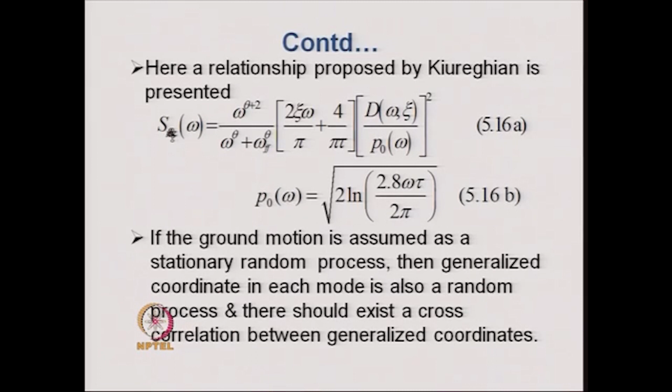Now, if the ground motion is assumed as a stationary random process, then the generalized coordinate in each mode is also a random process, and there should exist a cross correlation between the generalized coordinates, as I mentioned before. So, with this background in view, the response spectrum method of analysis can be extended for multi-support excitation, and today we are going to discuss about that.

Because there exists a cross correlation between two modal peak responses, if we consider these rho ij, then the CQC rule provides a better estimate than the SRSS rule of combination, that we mentioned also.

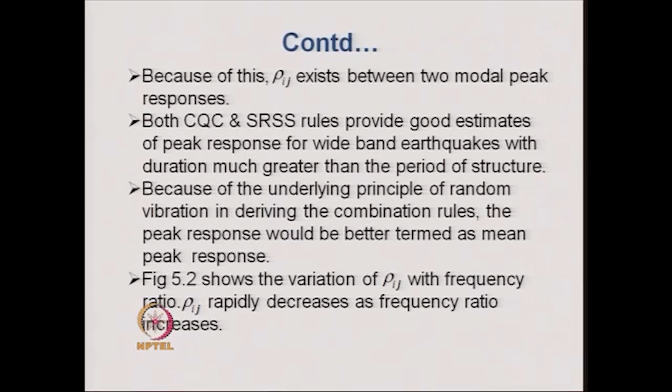So, let us see what basically rho ij looks like, that is the correlation between the two modal responses rho ij, plotted with respect to omega i by omega j, that is the frequency ratio between the two modes. If we look at that plot, it looks like this, and the corresponding equations 5.14 and 5.15 that we discussed in the last lecture show that rho ij is a function of beta ij, where beta ij is the ratio between omega i and omega j, and xi is the specified damping ratio.

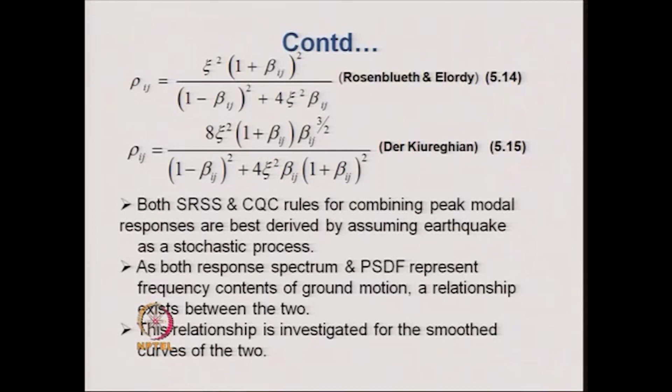So, two such empirical equations for rho ij were developed, one by Rosenblueth and the other by Der Kiureghian, and if we plot them against beta ij, that is the frequency ratio, the plot looks like this, and one can see that the left hand side is a symmetric half of the right hand side. If we look at the right hand side, that is the positive frequency ratios, we can see that as the frequency ratio omega i by omega j increases, the rho ij sharply falls down, and beyond a certain value of the ratio, the correlation coefficient is almost equal to zero.

That justifies the use of SRSS rule. SRSS rule is applicable when the two frequencies are well separated, and once they are well separated, the frequency ratio is also high, and as a result the correlation between two modal responses can be ignored and they can be considered as independent random variables.

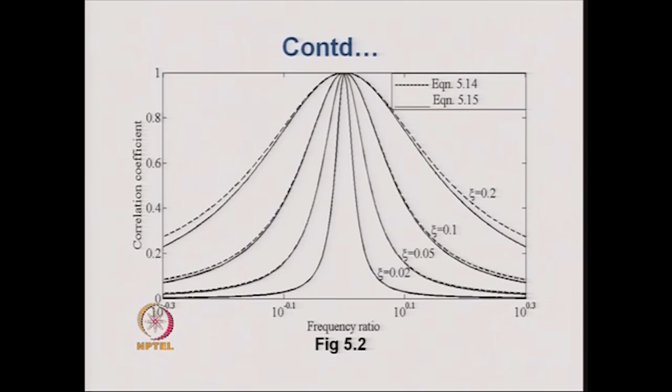Using this figure and two equations, that is the empirical equation on rho ij that was developed, we take care of the correlation between the two modal responses, and using the CQC rule one can obtain the combination between the two responses.

Now let us look at an example. In this example, what has been done is that the power spectral density function has been obtained from the smooth displacement response spectrum and FFT of the El Centro record. That is, we used the El Centro record, and from it we obtained a response spectrum and smoothened it.

Then also for the same time history, we obtained the power spectral density function using FFT, and it was smoothened, and then these two were compared in this figure.

You can see the unsmooth comparison, that means the unsmooth power spectral density functions obtained by these two approaches are compared in the first figure, and then when they are smoothed with 5-point smoothing, you can see that both PSDFs compare quite well.

That is the equation used for obtaining the power spectral density function of ground acceleration from the displacement response spectrum for a given damping, and it is quite valid, as seen from this example.

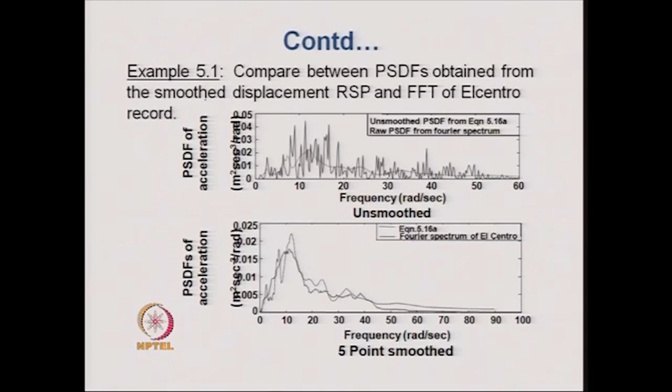Now let us come to the application of the response spectrum method of analysis for 2D frames. 2D frame means a building frame, multi-bay, multi-story building frame, and for that we proceed in this fashion. First, the dynamic degrees of freedom are considered, and generally for 2D frames these are considered as the sway degrees of freedom.

These sway degrees of freedom are obtained by the condensation procedure, done slightly differently than the condensation procedure discussed before. Here, we write down the entire stiffness matrix of the frame with the rotations included.

Then we apply unit load in the sway direction one by one. That is, first we provide a unit load at the top of the frame and put 0 corresponding to other sway degrees of freedom, perform an analysis of the structure, and find out the sway responses at all degrees of freedom, putting them into a vertical column.

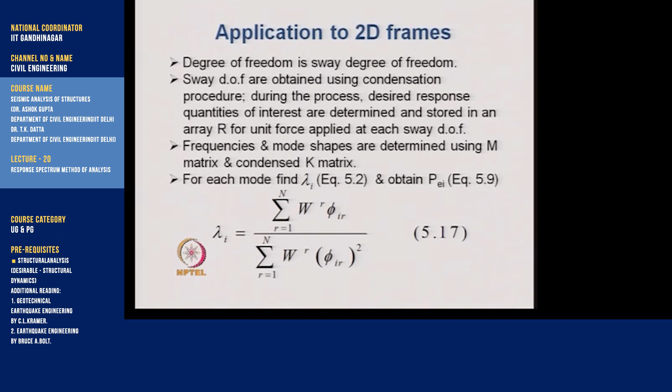So, corresponding to the sway degrees of freedom, this flexibility matrix of the structure can be inverted to obtain the condensed stiffness matrix for the sway degrees of freedom of the frame.

Sometimes there are algorithms which require only the mass matrix and the flexibility matrix of the structure rather than the stiffness matrix. With the help of that, the eigenvalues can also be obtained. So either we invert the flexibility matrix or we directly use the flexibility matrix to obtain the mode shapes and frequencies of the structure.

By the time we do that, we have also in an array R the response quantities of interest that are stored for unit forces applied at different sway degrees of freedom.

Now, for each mode of vibration, one can calculate lambda I using the equation described before. Instead of the mass m into I, we replace it by a summation convention, that is W r into phi I r, summed for all the floors, where W is the weight of the floor rather than the mass. Since the mass appears both in the numerator and denominator, it does not matter whether we consider mass or weight.

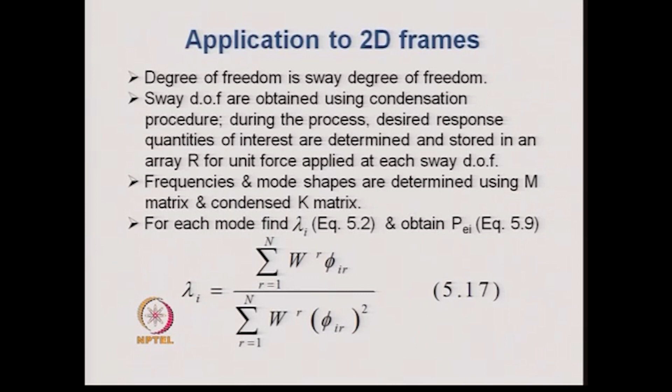Once we obtain the lambda I, we obtain the PEI, the equivalent lateral load that exists on the structure for each mode of vibration, from J equal to 1 to R. R is the number of modes considered, and PJ is calculated as discussed before for single point excitation.

Any response quantity of interest, say Rj, such as bending moment, shear force, drift, or any other response quantity, can be obtained by multiplying the equivalent lateral load with the coefficient matrix for the response obtained before and stored when obtaining the flexibility matrix of the structure by applying unit load at different sway degrees of freedom.

After that, one can combine the modal peak responses either using the CQC or SRSS rule, and that provides us the mean peak response that is desired.

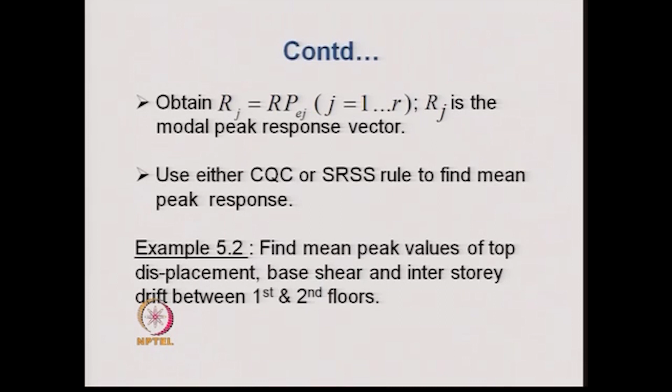A problem is now solved to obtain the mean peak values of top displacement, base shear, and interstory drift between the first and second floor for a 4-story 2D frame, which was solved before for the deterministic ground motion, the same El Centro ground motion, applied as a time history to this 4-story frame. The peak values of those results are known to us, and the same frame is now analyzed using the response spectrum method of analysis.

Here the response spectrum used is that of the El Centro earthquake. The digitized values of this response spectrum are available in many books, including the reference book for these slides.

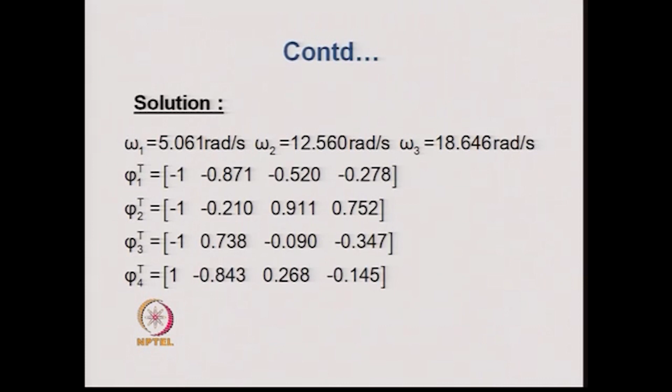The frequencies omega 1, omega 2, and omega 3, the three frequencies of the structure, are given, and then the corresponding mode shapes are shown. We have given all 4 modes.

Then we compared the mean peak values of the responses obtained by different methods in Table 5.1. When we consider 2 modes only, the SRSS rule gives 0.9171 as the response. The CQC rule gives 0.9121, quite close. The absolute sum gives 0.9621, which is expected to be greater than the CQC or SRSS rule.

The time history response provides 0.8921, which we obtained in chapter 3 when discussing the response of the same frame for El Centro ground motion using the time integration technique. One can see that the time history response analysis and the response spectrum method of analysis give quite close results.

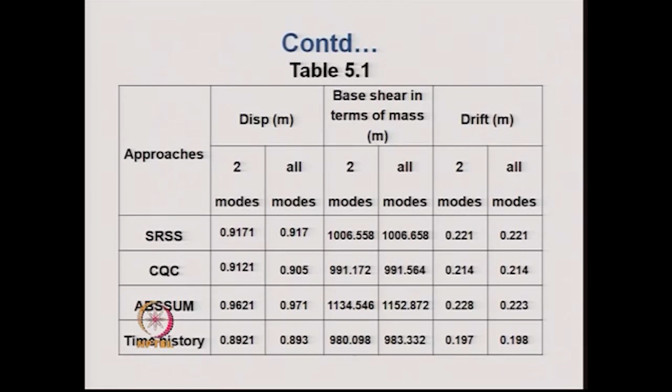Now let us look at the application of the same response spectrum method of analysis for 3-dimensional tall frames. In the code of practice, the response spectrum method of analysis and its formulas are given specifically for 2D frames. For 3D tall frames, the code does not provide the kind of guidelines we will be following here, that is, it does not provide the responses using the response spectrum method the way it should be performed.

It considers the torsional effect of the 3D tall building in a slightly different way. However, here we will be following the response spectrum method of analysis for 3D tall frames, which is just an extension of what is done for 2D tall frames.

Now, for the 3D tall frames, we find out the principal direction of the 3D tall frame, and for each principal direction we can apply the ground motion separately and find out the response. The following steps are adopted.

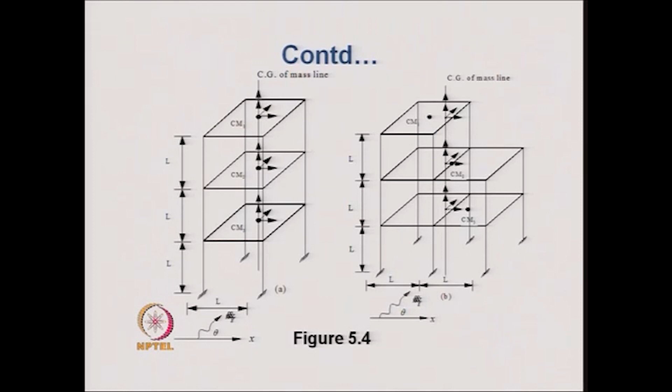Once we have done that, we apply unit load to each dynamic degree of freedom one at a time, and carry out the same kind of static analysis that we performed for the 2D frame to find out the condensed stiffness matrix and an array, or R matrix, of the responses of desired quantities.

Then we go ahead in the same fashion as we have done for the case of the 2D frame. We now have different mode shapes and frequencies, and for each mode we will get a mode participation factor. Once we use the mode participation factor for each mode, one can obtain the general single degree of freedom equation written in terms of the generalized coordinates.

Because of the coupling of the mode shapes, in certain cases we have a translation in 2 directions as well as a torsion. So that kind of mode shape is known as the coupled mode shape.

For the coupled mode shapes, we have a torsional moment created at the intersection point of the mass vertical line with the floor, apart from the 2 forces that can act in the 2 translation directions.

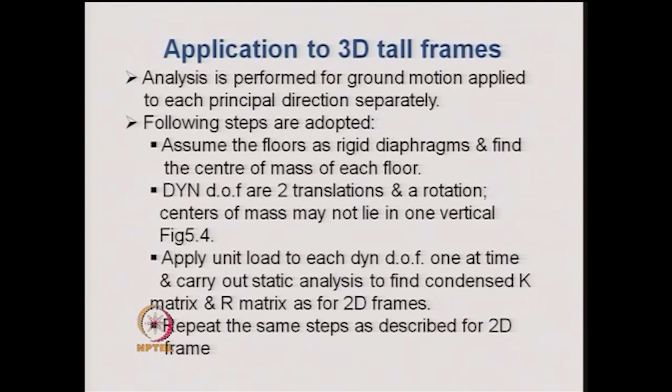So the equivalent static load, PEI, that we had seen before for the 2D frame, now we expect there could be torsional moments apart from the translational forces in x and y direction for a 3D frame. Thus, for an asymmetric building, we expect both a torsional motion about the vertical axis and two translational displacements in x and y directions.

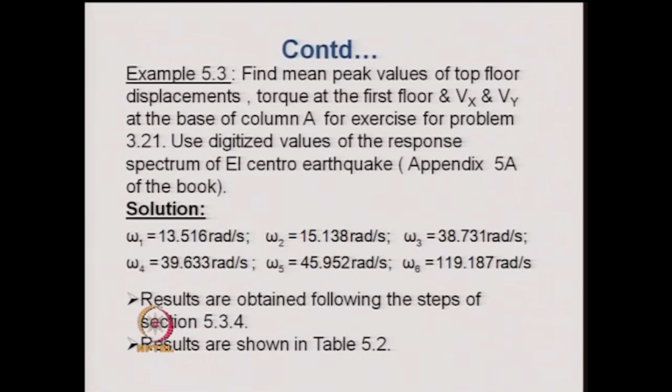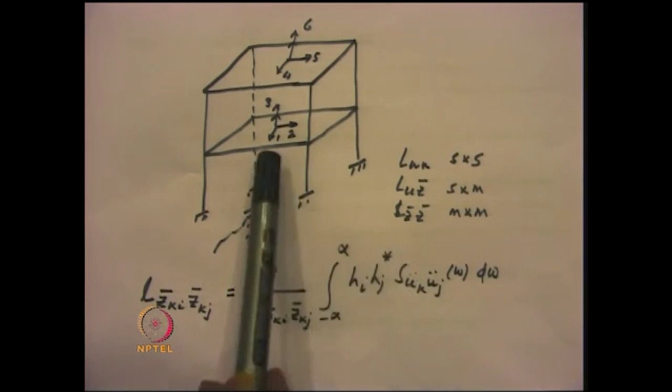An example of this type is solved for this particular problem, in which we have taken a two-story frame. In this two-story frame, the degrees of freedom are considered as 1, 2, 3 and 4, 5, 6.

These are the degrees of freedom, and corresponding to these 6 degrees of freedom, we obtain the mode shapes and frequencies of the structure. That is, we had 6 mode shapes and 6 frequencies, and the response quantities required are the torque at the first floor level and Vx and Vy at the base of column A, which is to be found out.

So for these response quantities, we obtain an array or matrix R, that is the R matrix we talked about when we were obtaining the flexibility matrix for this structure, by applying unit load one at a time at each degree of freedom.

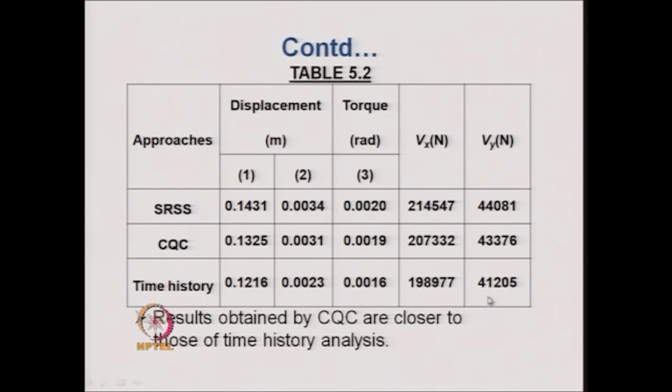The torque obtained using the CQC rule and the time history analysis about the vertical axis compare quite well. So far as the shear forces in the x and y directions are concerned, the CQC rule and time history analysis also compare fairly well.

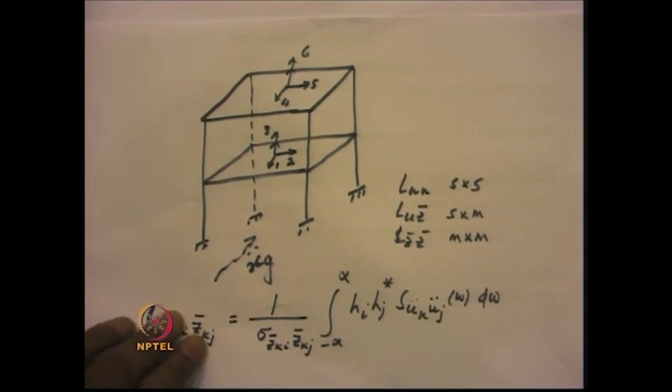Next, let us try to develop or extend the method of response spectrum analysis to the multi-support excitation case. As I told you before, the response spectrum method of analysis is not strictly valid for the multi-support excitation system; it is strictly valid for single point excitation, for which it was derived.

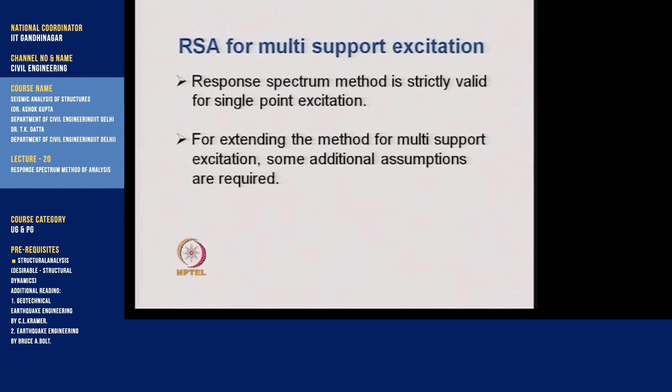However, if we wish to extend it for the multi-support excitation case, some additional assumptions are made. The derivation of the response spectrum method of analysis for multi-support excitation requires random vibration analysis—part of it uses random vibration analysis to arrive at the required equations that can be used for finding the mean peak response in the spirit of response spectrum method of analysis.

Since it requires some random vibration analysis, the entire derivation is not described here. However, some features of that derivation are mentioned so that the extension of the method for multi-support excitation can be understood. First, it is assumed that the future earthquake is represented by an averaged smooth response spectrum and a power spectral density function, both obtained from an ensemble of time histories.

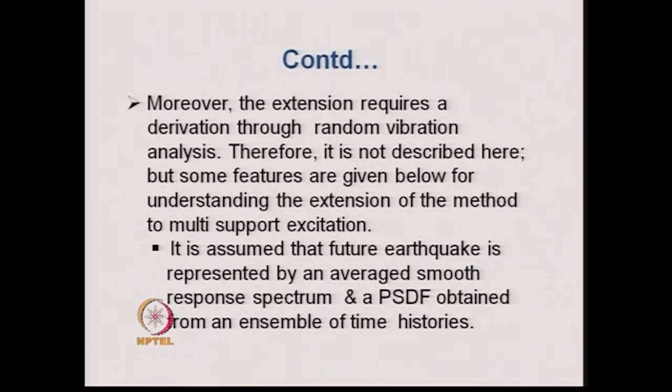With the help of a single time history using the Fourier transformation method, the power spectral density function of the earthquake can be obtained from the single time history record, the way we described when discussing the seismic input to the structure. Both the response spectrum and the power spectral density function thus obtained are smoothened.

The most important point in extending the response spectrum method of analysis from single point excitation to multi-point excitation is the consideration of the lack of correlation that exists between ground motions at two points. We have seen that this can be obtained either by knowing the time lag between the two supports or by using a coherence function.

For the case of random vibration analysis, we have seen that there are a number of empirical equations available to represent the coherence function, representing the lack of correlation between ground motions at any two points. We can use any one of these coherence functions, or the one appropriate for that particular site or area.

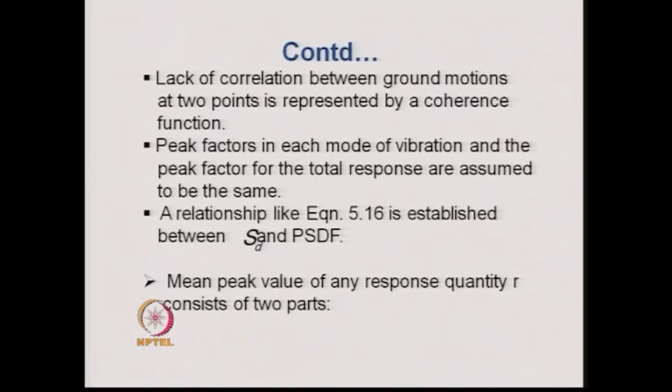The next assumption concerns the peak factor. We have seen that the peak response can be obtained by multiplying a peak factor with the standard deviation of response, or the RMS value of the response for the zero mean process, and that peak factor can be obtained with the help of the first three moments of the power spectral density function. We also showed an equation which provides the value of the peak factor, provided we know the duration and the moments of the power spectral density function.

Using that equation, one can find out the peak factor. Here we make an assumption that the peak factor in each mode of vibration and the peak factor for the total response, when we combine all modes of vibration to obtain the total response, are assumed to be the same. In fact, these peak factors in each mode may vary, and the peak factor for the total response could be different than the peak factors obtained for each mode. However, for the development of the method, a crucial assumption is made that these peak factors are all the same.

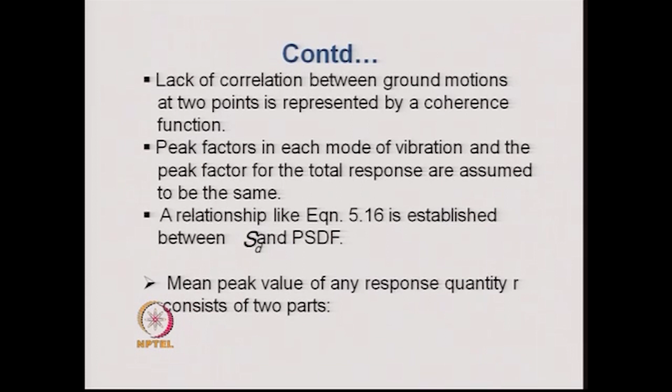Then a relationship like equation 5.16 is established between the power spectral density function of the ground motion and the displacement response spectrum. One such empirical equation was shown before in equation 5.16.

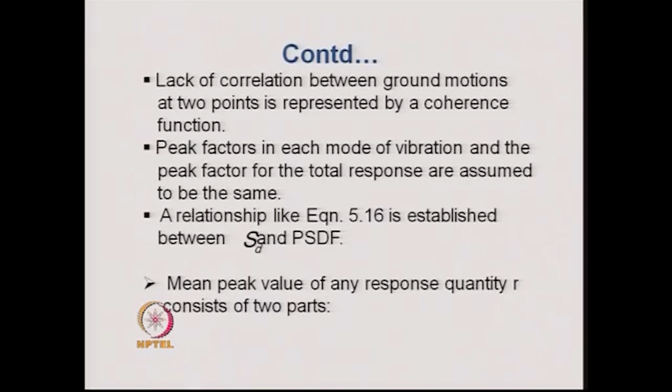Then the mean peak value of any response quantity of interest R consists of two parts. The first part is called the pseudostatic response due to displacement of the supports, and the second part is the dynamic response of the structure with respect to supports. These have been discussed before.

If you want to find the absolute displacements at the different non-support degrees of freedom, we have to add two responses. One is the dynamic displacement of those non-support degrees of freedom with respect to the base, and to that we add the displacement caused by ground displacement at different supports, which creates differential displacements between supports, resulting in displacements at different sway degrees of freedom. These are called the pseudostatic response, and this is added to the dynamic response to get the total absolute value of the response.

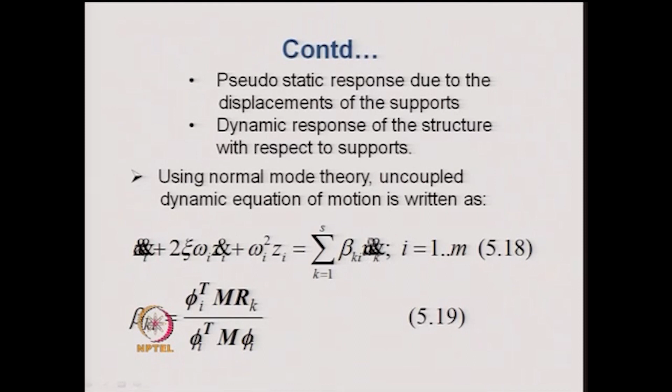Next we consider a single degree of freedom oscillator subjected to a ground acceleration u double dot k, that is the ground excitation at the kth support. If we consider that, then the response of the single degree of freedom oscillator to that support excitation is say z bar ki. Then the total generalized displacement in the ith mode can be written as this summation, that is beta ki multiplied by z bar ki, summed over all the supports.

Now, once we are able to obtain the value of z I, then the total response which we will be obtaining will be equal to two components of the response that we discussed before: this is the pseudostatic part and this is the dynamic part, which is coming from the dynamic analysis or modal dynamic analysis that we have performed.

Now, phi bar I is the mode shape coefficient for the response quantity of interest. It could be displacement, bending moment, or shear force, but this phi bar I has been obtained before, and how we obtain the mode shape coefficient for different response quantities of interest, that we have described before while discussing the modal analysis technique.

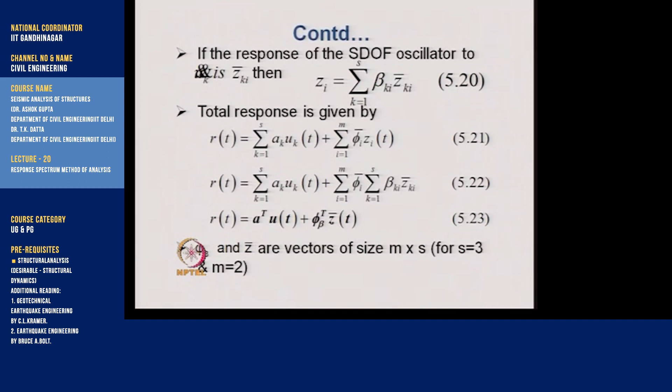Using those elements of the matrix one can find out a response quantity, or the pseudostatic response quantity, using this summation. Now, this AK could be a coefficient for displacement, bending moment, or shear force, whatever be the response quantity of interest. So, this is the pseudostatic part and this is the dynamic part.

Then what we do is that we substitute in place of Zi this equation. As a result of this, this RT, any response quantity of interest, can be written in this particular form.

Now, this equation can be written in the matrix form, in which AT is the transpose of the coefficient matrix for pseudostatic response, UT is the vector of the ground displacement at different supports, and phi beta T is a transpose of a matrix called phi beta. We will shortly explain what it is, and Z bar T is the response of the generalized displacement that we obtain for each mode of vibration.

The phi beta and Z bar are vectors of size m into s, that is, m is the number of modes that we are considering and s is the number of supports. For 3 supports and 2 modes, one can further elaborate this phi beta vector and the Z bar vector.